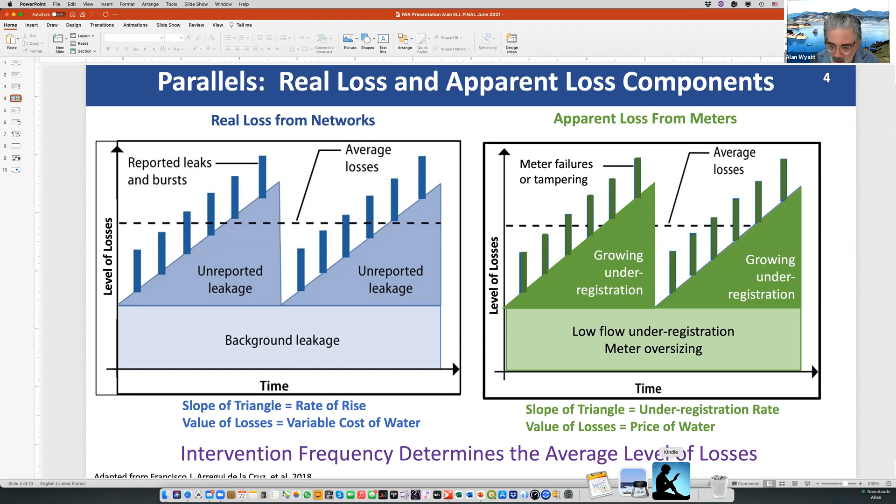Next, I want to just quickly highlight a couple of the ups and downs, positives and negatives. ELL is a really powerful tool in terms of balancing the value of lost water and the cost to save it. In a good world, a perfect world, it provides guidance on the best use of financial and water resources, in the best interest of citizens.

It's focused locally, which is important. In many cases it's not highly sensitive to inputs; in others it is. Another important point is that it can be represented as a range. You have what I call a valley here in the total cost, so you can operate in the valley as opposed to the very bottom of it.

Along with collaboration, ongoing evolution, application, and refinement is essential, and a key part of making it stronger. Now, on the other hand, there are, let's say, some downs, what I would call controversies or difficulties: is this the right methodology for us? Is this just some bothersome regulation? There are different points of view between financial regulators and water resource regulators, and we see this in many countries.

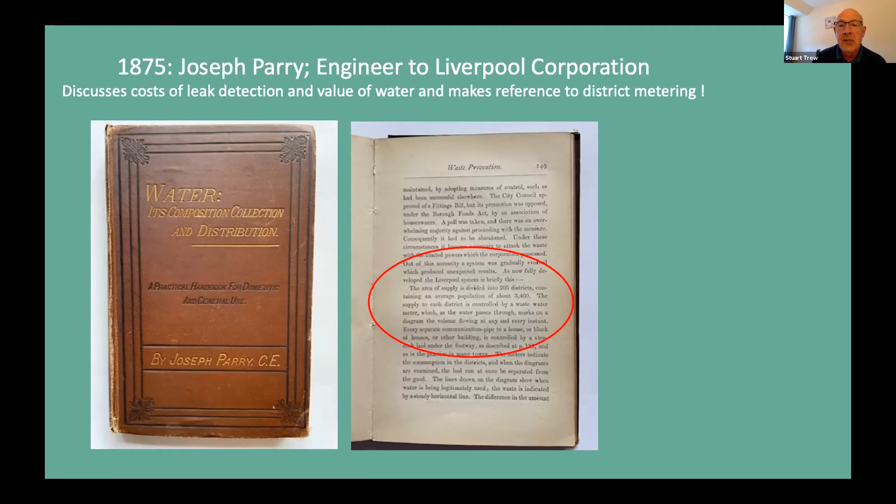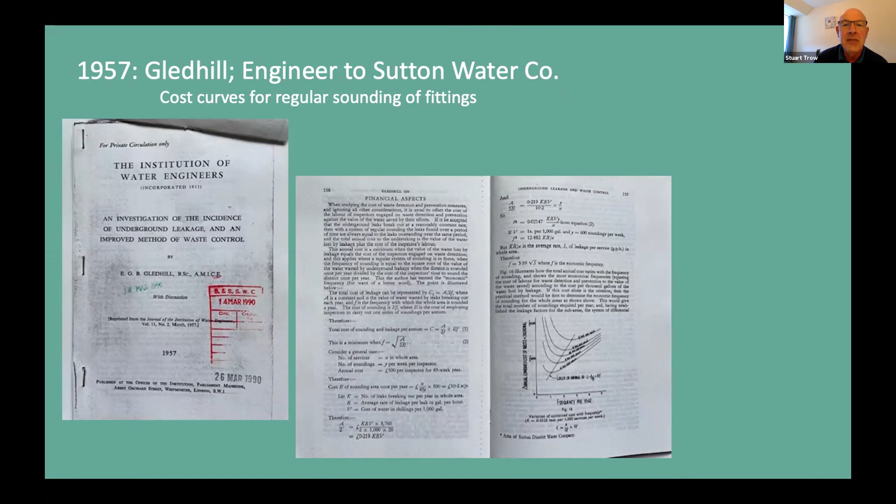And again, in 1974, symposium on waste of water for the Institution of Water Engineers, a lady called Judith Rees produced quite a detailed paper on economic level of leakage. Again, though, it was all short-run economic level of leakage.

The first real industry-wide research was carried out after a drought, quite a major drought in the UK in 1976, and led to the production of Report 26, which became the key reference document for leakage for a good 20 years or so. And in there you can see it defines the problem in clause 4.01.

It's clearly uneconomic to ensure that pipelines and reservoirs will never leak. It's also clear that there's an economic limit to the loss of water that should be tolerated through leakage. But Report 26 didn't really go into a lot of detail about how you should assess the economic level of leakage.

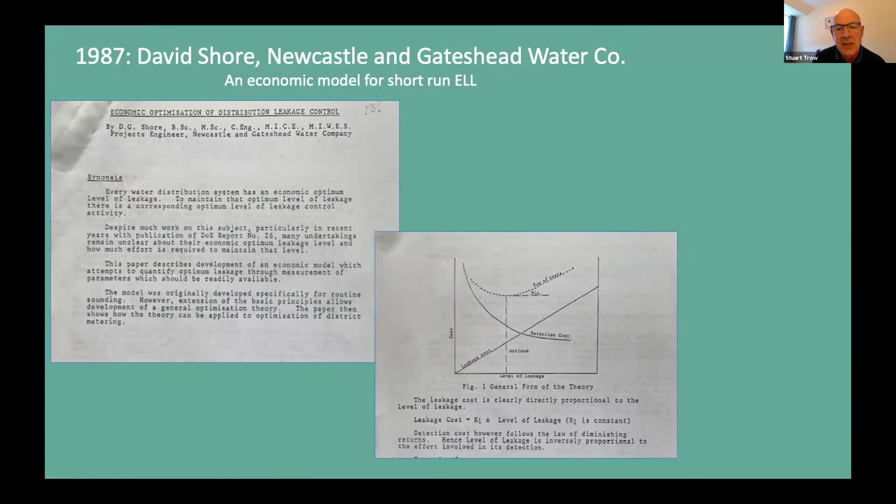It was only in the early 1980s that Judith Rees produced another paper, a second look at economic level of leakage. Then one of my colleagues, when I was at the water company, Newcastle and Gateshead Water Company, David Shore, produced an economic model. And this was the first time in my career that I saw this curve that Alan has shown, balancing the cost of detection and the cost of the lost water.

Then we had another drought in the UK in the late 1980s, and that led to a major research project, the UK National Leakage Initiative, and the definition in what was called Report C. I chaired the group that looked at economic level of leakage, and you can see down here it defines that the economic level is that level of leakage where the marginal cost of active leakage control equals the marginal cost of the leaking water.

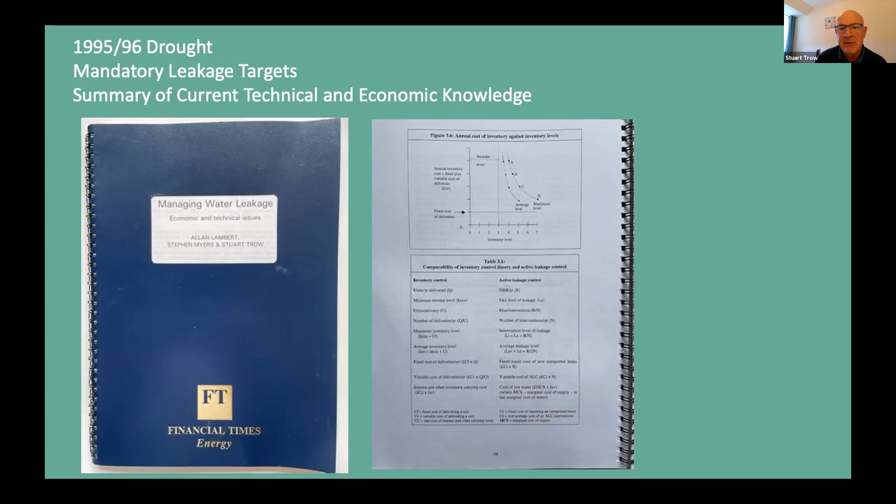Then another drought in 95, 96. We seem in the UK to have droughts that bring leakage to the attention of the public and the media, and then we do some research and publish some reports. I think it was 1997, Allan Lambert, myself and Stephen Myers got together and produced this document for Financial Times. We talked about economic intervention frequency and natural rate of rise and so on.

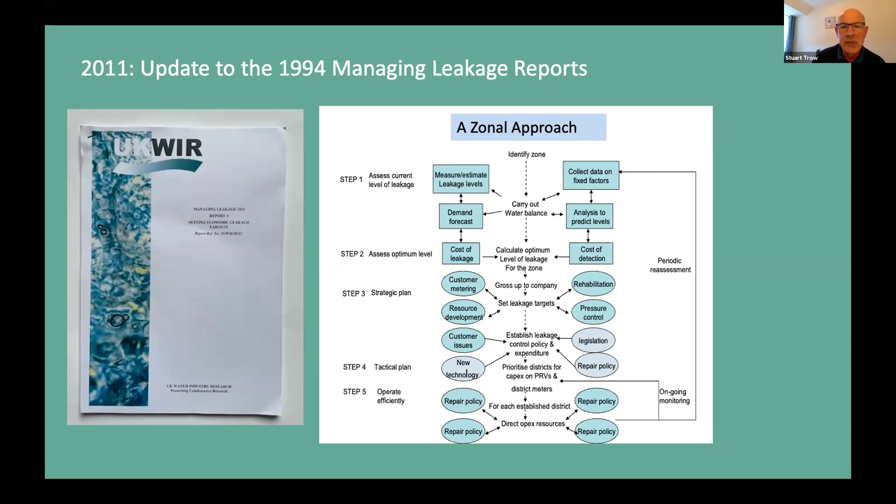And then updates to managing leakage in 2011, which David Pearson, who's on the call, was involved in, and Joe Parker, who's a member of the water loss group, was involved in this as well. We recommended a zonal approach where we calculate ELL at a zonal level, taking account of all of these factors, and then we gross it up to the company. So ELL is the balance somewhere between the current level of loss and the unavoidable level of loss.

Where do we land in that range?

Short-run ELL, to come onto some of the definitions, is about balancing the steady state. This is with current infrastructure, current pressure, looking really at active leakage control, find and fix only, but maybe some simple pressure management. So it's steady state.

Alan asked the question, which I think led into this: do we include repair costs or not? And the answer for short run ELL is no, because those repair costs are probably similar year on year. What you're doing here is balancing, influencing the runtime of those leaks by active leakage control and the flow rate from those leaks by pressure management. But generally you have the same number of leaks and you have to repair the same number of leaks.

So the factors affecting ELL: background level of leakage, the natural rate of rise of leakage, the cost of water, cost of ALC, and what you're doing with pressure management. I won't go into detail, but these are the things that you include in the cost of water when you're looking at short run ELL.

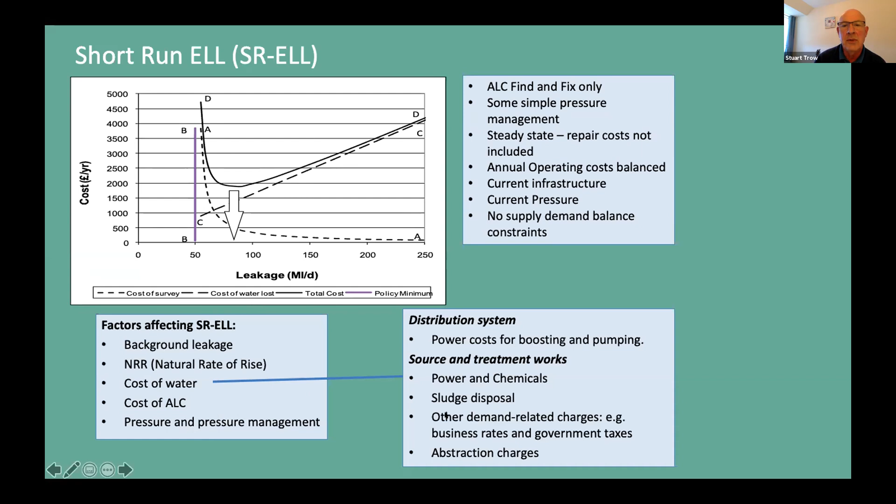Terminology, I've referred to some things already. So steady state is where the annual rate of repair is in equilibrium with the rate of breakout. Backlog is where you're not repairing leaks at the rate in which they're building up, and so you build up a backlog of leaks in the network.

And to reduce that backlog, you have a transition cost, and this is where, Alan, you should take repair costs into account. David might forgive me for showing this diagram, which I produced some time ago to try and explain this situation. I'll try and do it as briefly as I can.

Imagine a train on a track dropping off leaks, or barrels of water, along the side of this track, and it's followed by another train picking those leaks or those barrels of water up, running at the same speed.

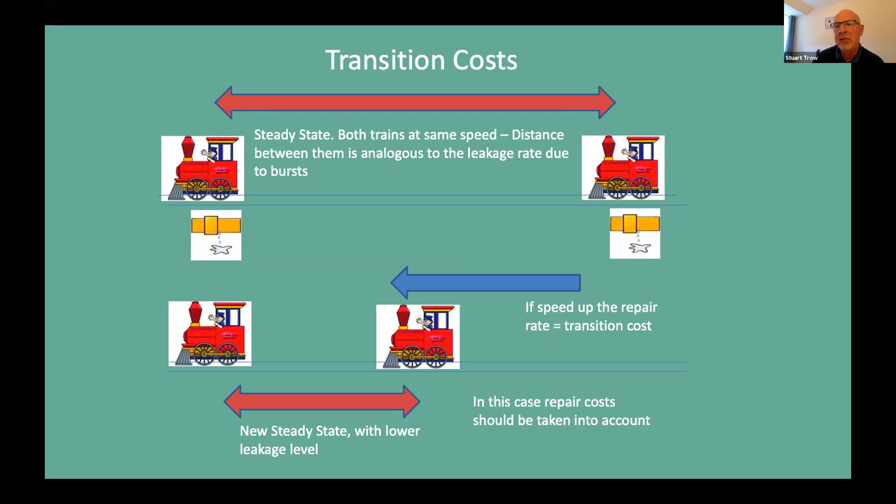The distance between those trains is equivalent to the level of leakage in your network. To reduce the level of leakage, the second train speeds up, picks up the barrels of leakage or repairs the leak, and you have a new steady state. It can't overtake the train in front, but the distance between those trains is equivalent to the level of leakage. That's where we bring transition costs and repair costs into account.

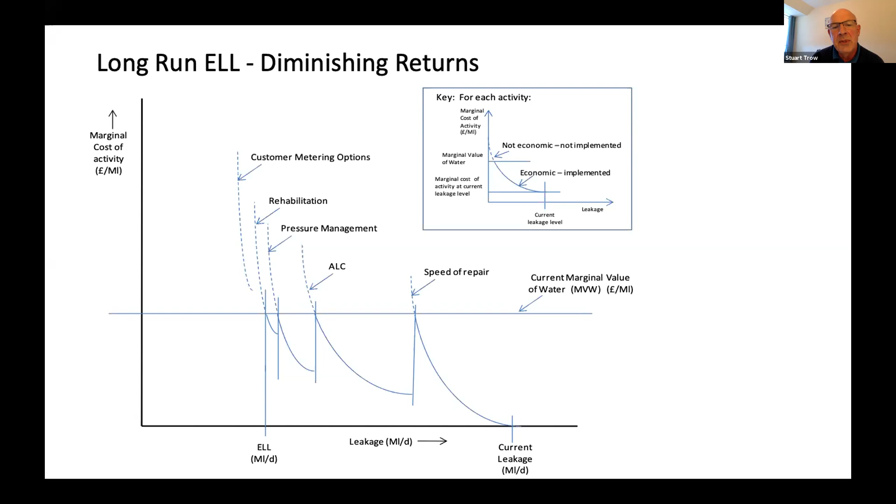So now moving on to long run ELL, everything we do with leakage follows a law of diminishing returns. Speeding up repairs is probably the most cost effective, then active leakage control, then pressure management. And then we get into some of the more expensive options of mains replacement and so on.

And when we're looking at long run, we need to take account of the demand forecast. We need to take account of the headroom, the difference between the available supply and the demand. As demand in the network increases, we start to reduce headroom. So the value of water will depend on how much headroom you have and how that changes over time.

Stuart, you need about 4 minutes or so to go. I'm sorry to press you, but run through as quick as you can, Alan.

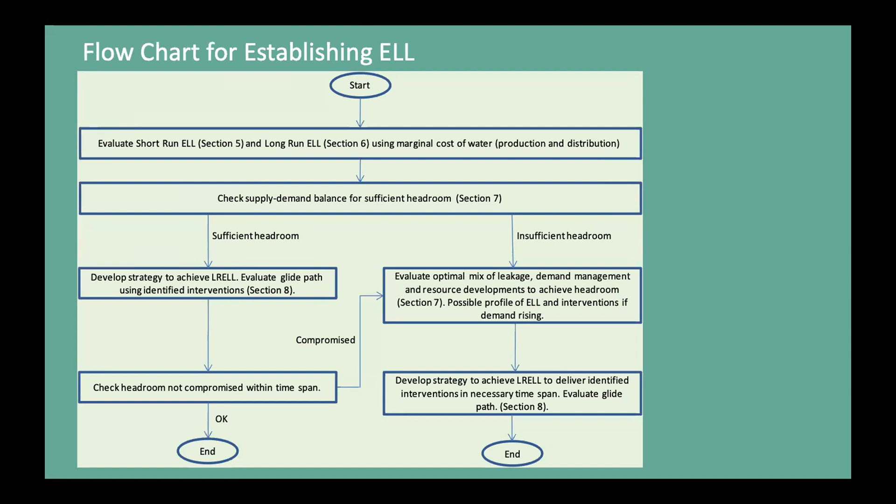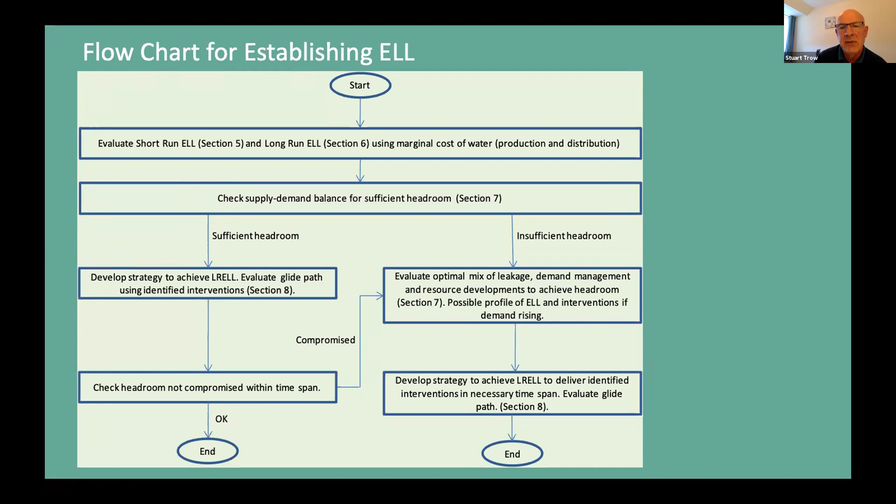So in one of the research reports that was done, we had a flowchart for establishing ELL. I won't go into detail, but you can see it follows two tracks: one where you have sufficient headroom down the left-hand side, and one where you have insufficient headroom down the right-hand side. And in the UK, we had a tripartite study involving the regulators in 2002.

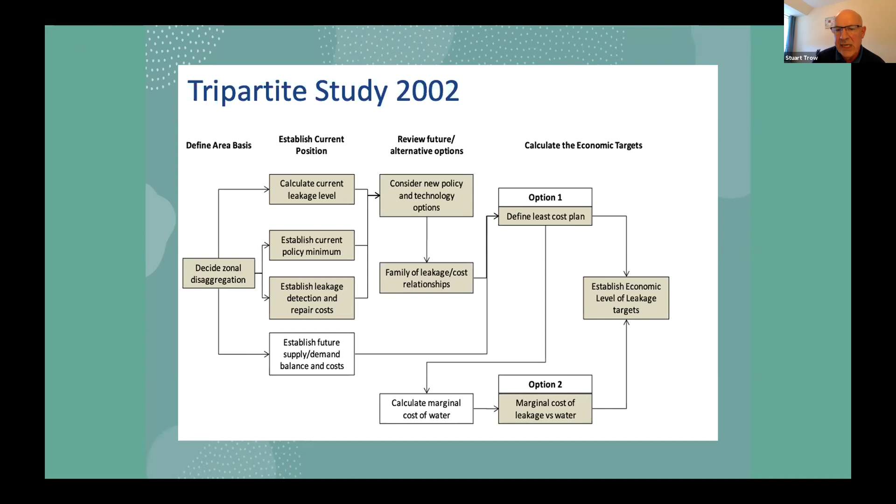They came up with a methodology of what we call the least cost plan for looking at the long run economic level of leakage. This is where we look at the available headroom, the target headroom, and as that headroom starts to reduce, we have interventions: ALC phase 1, pressure management phase 1, infrastructure replacement phase 1, and so on, to manage that demand to maintain the available headroom. The least cost plan is coming up with the least cost series of interventions to maintain that headroom.

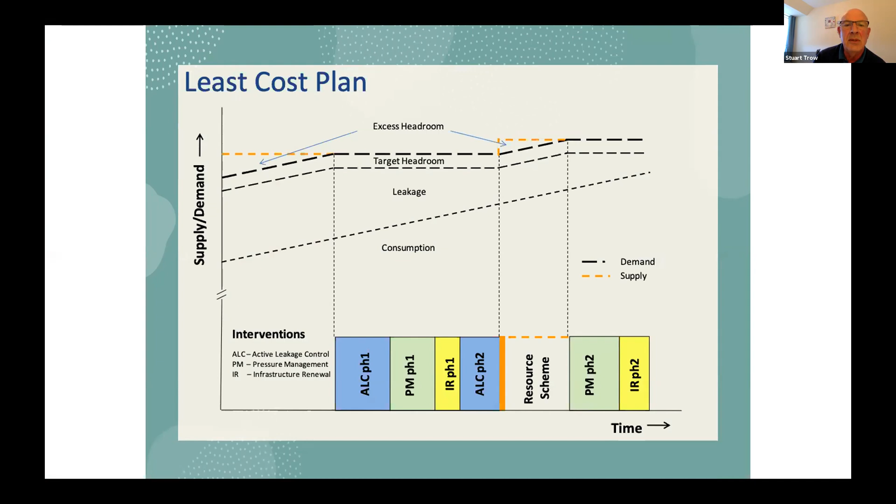Then that tripartite review was reviewed again, and there was a feeling that we needed to do more and put more value on the water. So instead of just looking internally at short run and long run costs within a company, this is where we started including what we call externalities.

Environmental and social costs are the difference between long run ELL and sustainable ELL. SELL includes social and environmental costs and other externalities.

SELL was reviewed in 2012. I was part of the SMC team that reviewed it, and we drew some conclusions, one of which was that it was becoming a bit of a self-fulfilling prophecy, in that SELL was heavily influenced by the background level of leakage and various other things. We made some recommendations, which again I don't have time to go into.

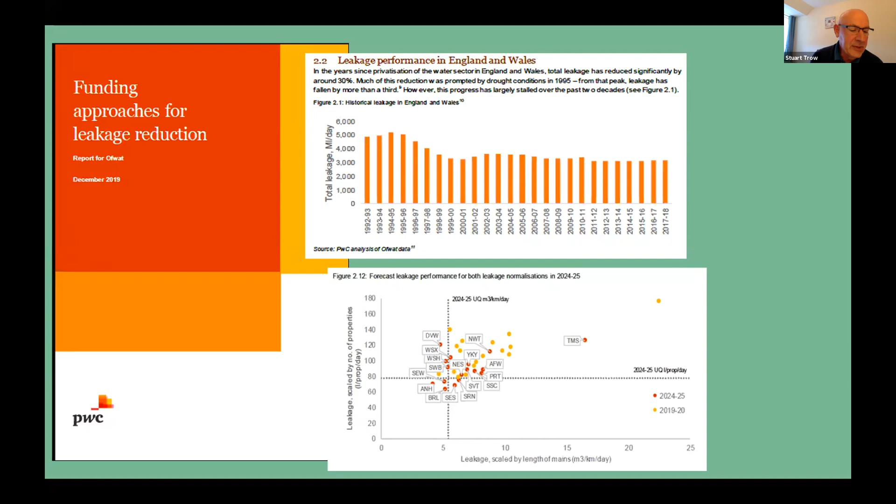But this is the final slide, to keep on time. Each year, OFWAT produce what's called a service and delivery report, and they look at a number of KPIs - you'll be able to find this report online. One of those KPIs is leakage, and essentially the companies are now assessed as to whether they've met their leakage target or failed their leakage target.

All of the companies accepted this challenge of reducing by 15%. I think some of them may be starting to regret that, because I gather that some companies have failed their target for 2021. Most have passed, but some have failed.

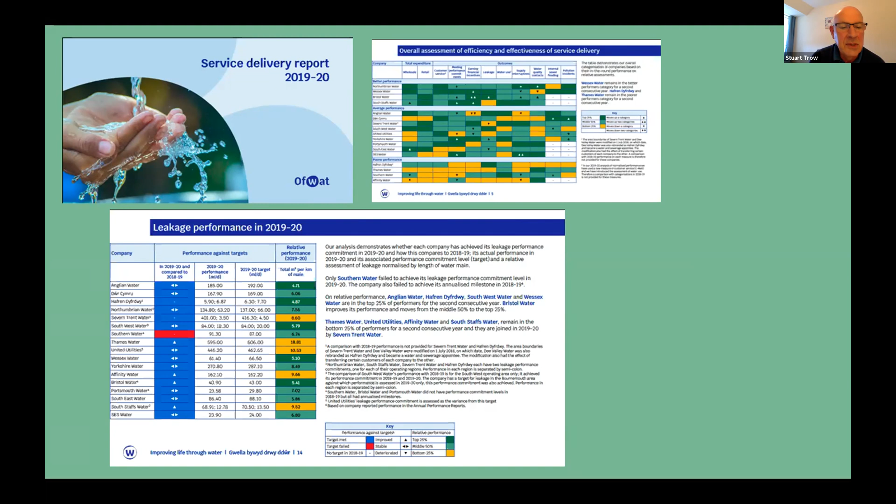I want to point out one thing - I highly recommend people look at those service delivery reports. I think they're brief but detailed, and I find it to be very useful. Second, you can see the process involved in the UK. This is not done overnight, and there are a lot of lessons learned along those years.

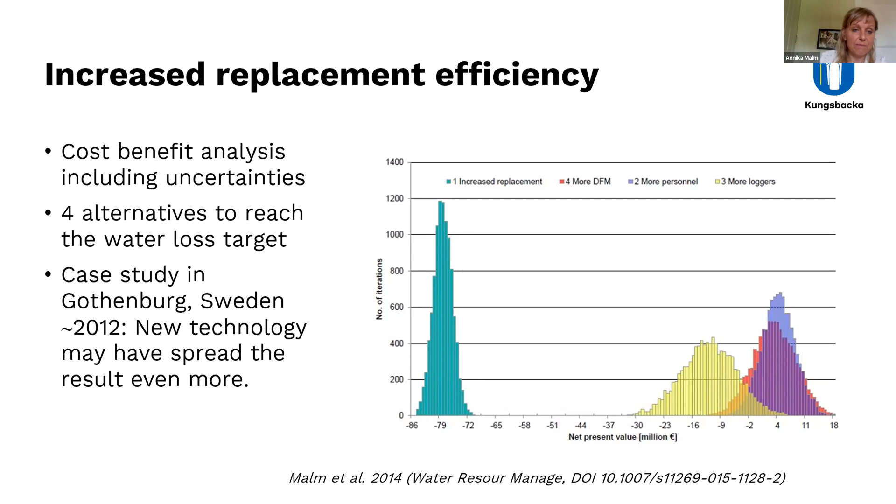So the conclusion of the study or the project we did is that, of course, ELL and CELL, it's for you when you are managing the utility itself. So you have to find your own level, and then you need to know how you should work with it in your utility. But you get a very good help with this spreadsheet that we developed. And ILI, we think in Sweden, it's good for benchmarking between different cities, because it's so different. Some municipalities have a very long length of pipes and others are very dense. So this ILI is good for us to benchmark between cities and utilities. And when you work with this, you get control of your water losses and you get control of your system, and that is also a value.

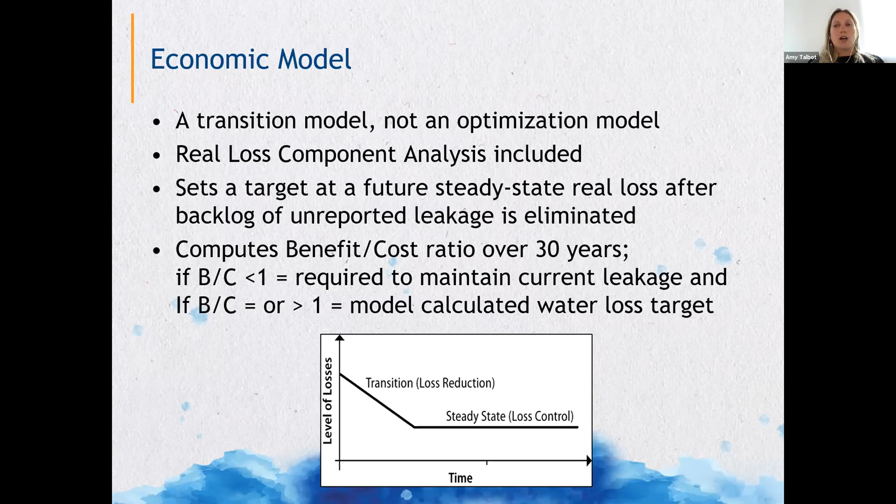So this was sourced from the M.Cubed David Mitchell memo that we had done for this purpose.

Okay. Thanks, Alan. It's a pleasure to be here to share my experience with the economic model, and I will show some topics here. I'll start with before 2010. We had some questions like: what is acceptable water loss for allocation? Sanepar operates 345 municipalities, but what is a good water loss for each location? How much resource is it worth investing to reduce losses? How low should we go?

Then I watched Alan's presentation at the Water Loss Congress 2010 when he presented this document, and I thought, problem solved. So I started... You're exaggerating, but anyway, go ahead.

I started to study the topic, and I realized I had another problem. We need a water balance. We need more data, field data. But now we have a translated and updated manual, which Rita is going to present.

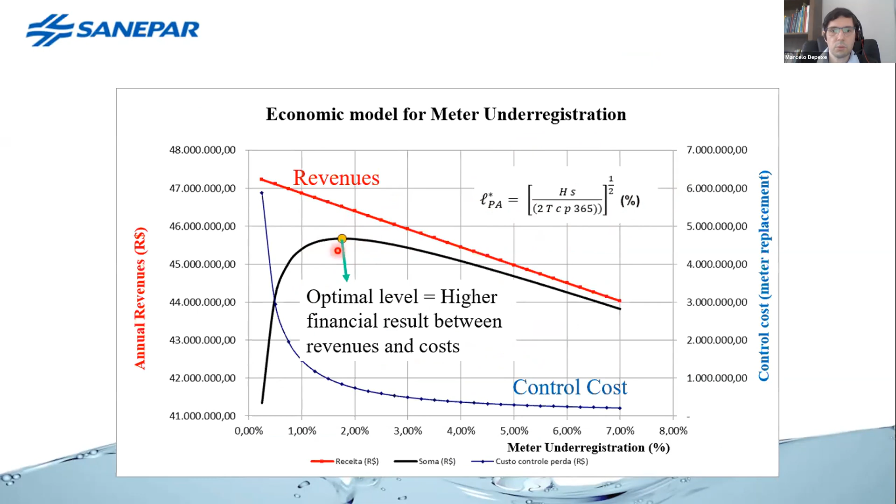We made some improvements in this model, like the inclusion of the initial meter under-registration of new meters, calculation of what I call a net tariff, discounting the government taxes and fees, and model application for each cubic meter of consumption, instead of just one calculation for the whole considering the average. This is because for different consumption levels, we have different prices in the tariff, and sometimes the cost of the meter is different.

For example, if the average consumption is 12 cubic meters, we will have one result in terms of optimal under-registration and time for replacement. But that's different if the consumption is 18, or different if it's 23. So in this way we have more accuracy, and that originated a new policy for meter replacement.

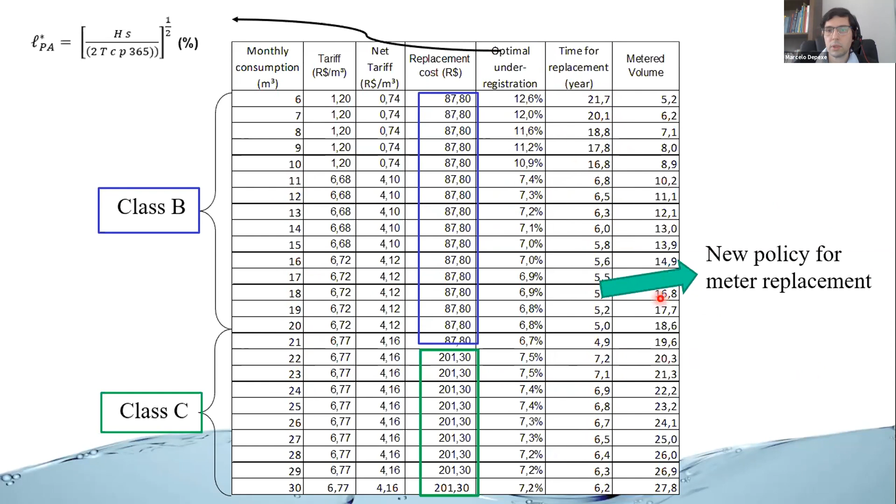In the real loss model, we have a variable water production cost, a capital cost for expansion, and the control cost. We look for the minimum point on the total cost curve. But here it's more difficult because we need data from the specific location, which depends on the specific characteristics.

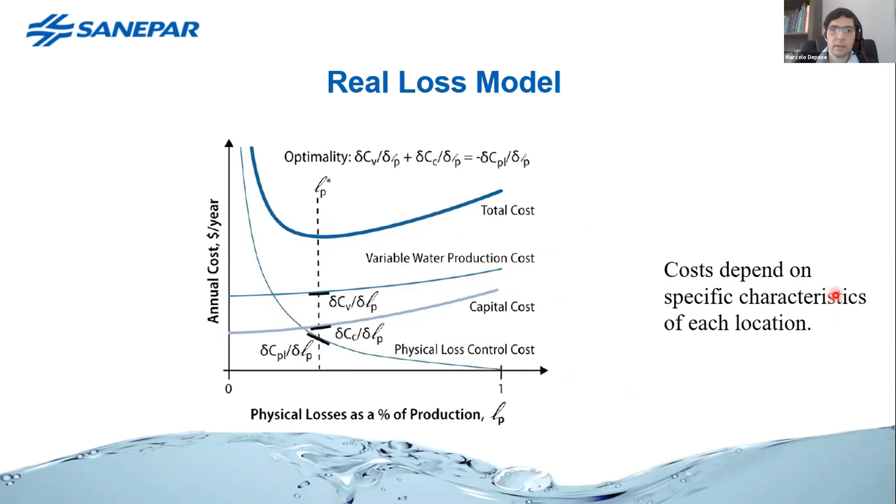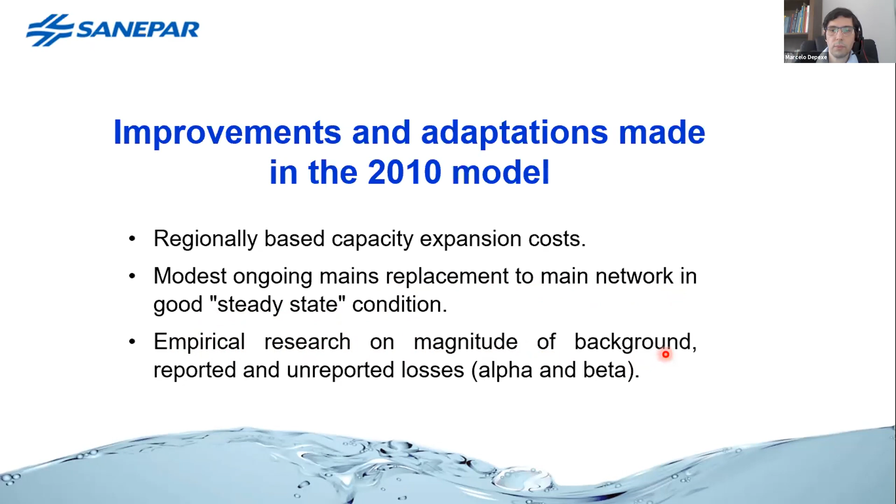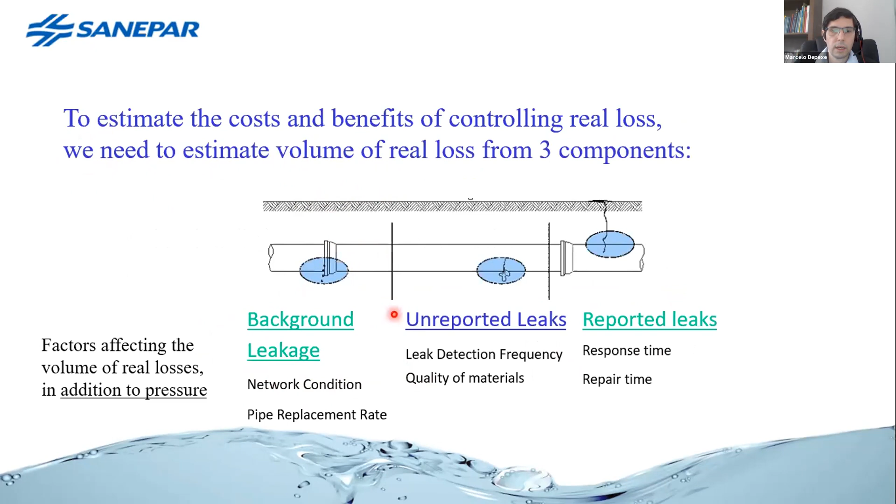Some improvements made in this model are a regionally based capacity expansion cost, a modest ongoing main replacement to keep the network in good steady state condition, and empirical research on the magnitude of background, reported and unreported losses. Because one of the important things in this model is the need to estimate the volume of these three components: background, unreported leaks, and reported leaks.

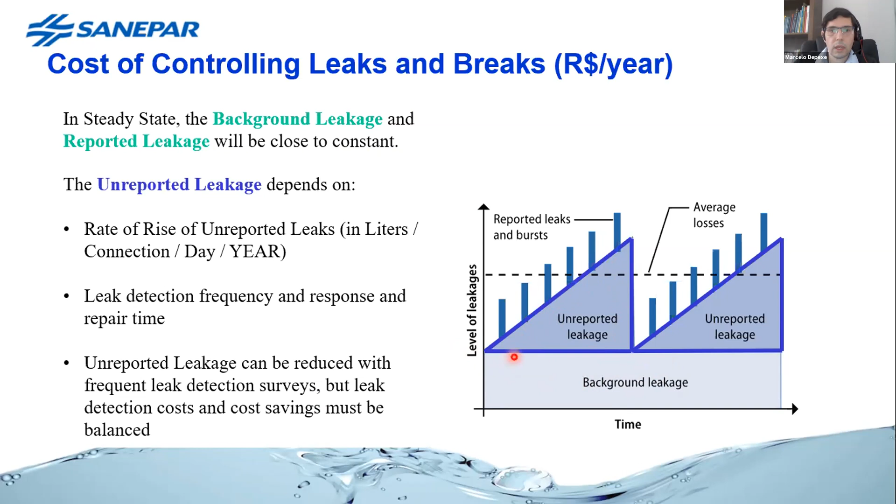The model works on the reduction of unreported leakage, and that depends on the rate of rise and leakage detection frequency. We call alpha the background leakage plus reported leakage, and beta the unreported leakage, which is the increase per year of unreported leakage.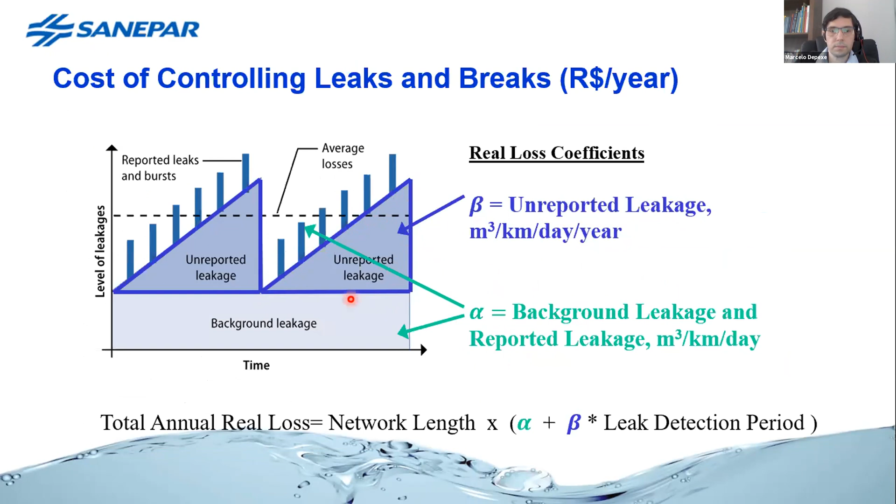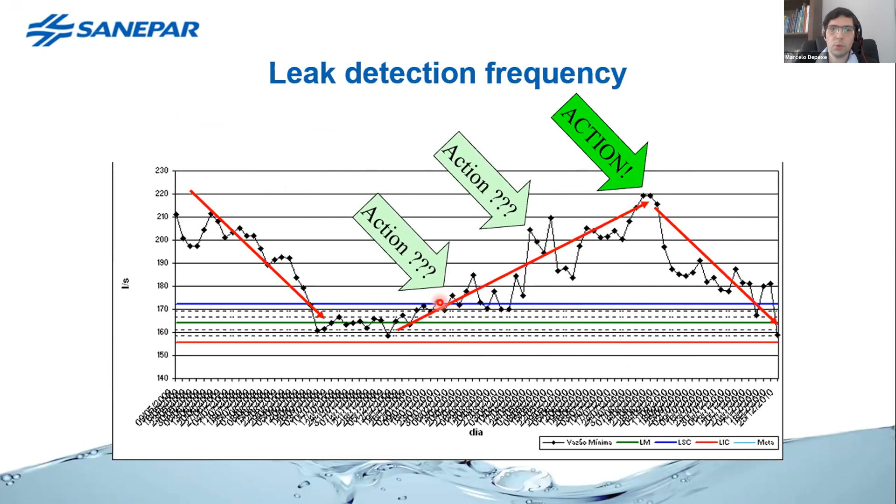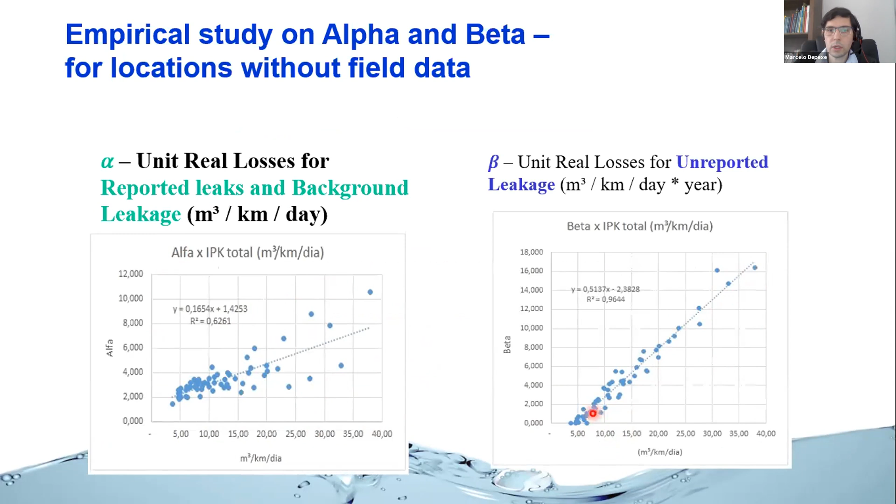For this, we use concepts like burst and background estimate, fixed and variable area discharge, and unavoidable real loss. But this requires field data, lots of field data. For locations without field data, or with less reliable data, I made some empirical studies trying to correlate this with total loss, and we got good results, especially for beta. This can help the work Rita will present next.

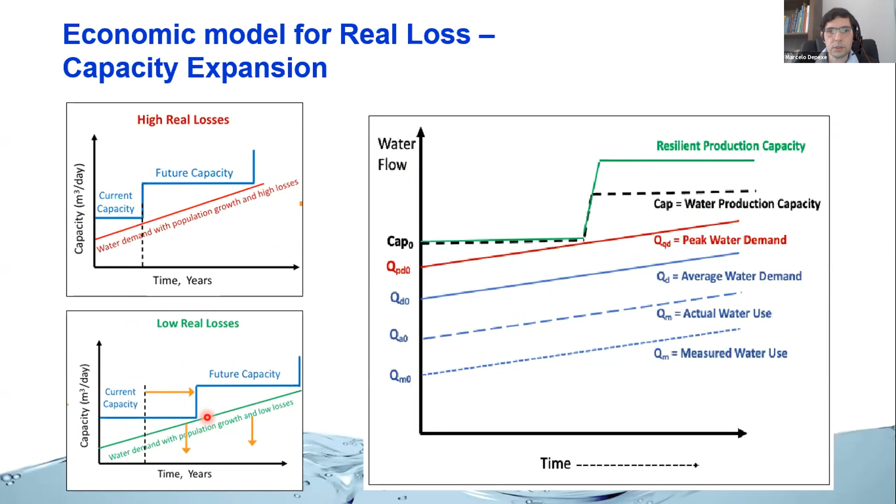And that is an example of the result of the real loss model. We look for this yellow point here. In this example, the economic level is 70 liters per connection per day. But we realize that here we have a patamar, an interval. We can set up an interval in this example between 63 and 80 liters per connection per day. The total cost is very similar.

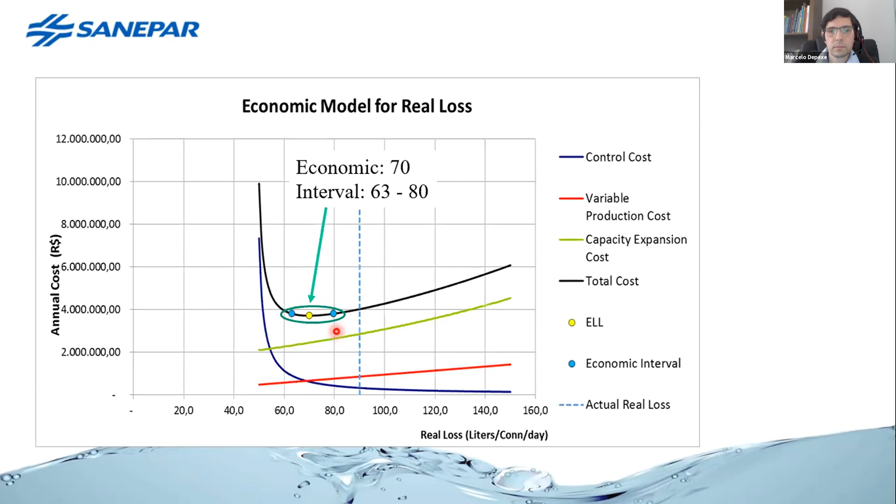So the target doesn't need to be exactly a point, but it should be an interval. And the width of this interval is influenced by the magnitude and the shape of this green curve, the capacity expansion curve. So for example, if the costs are small, both capital costs, the economic level is higher and the interval is wide. But if costs are higher, if you increase the costs, the economic level is lower, like 70 goes to 63, and the interval is smaller. So you need to pay more attention in this situation. The total cost here will increase faster.

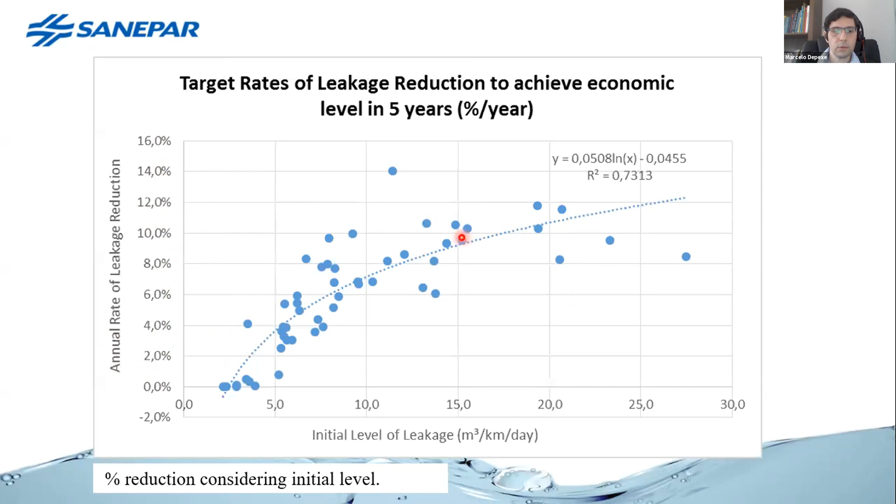And now we start to study the evolution, how much time we need to achieve this economic level. So here is an exercise to try to understand the target rates of leakage reduction to achieve that economic level in 5 years. Some systems probably will take more than 5 years to achieve that economic level. So the identification of economic level of losses makes it possible to optimize the available resources. The economic model is very useful for setting targets and investments, and the time needed to reach the economic level varies from place to place.

Thank you. Here's my email, and we can ask some questions later.

Thank you, Alan. Thank you, Marcelo. Alan, you are muted, we can't listen to you. Oh, thank you, Rita. I was just thanking Marcelo for a good presentation. There is a question we will get to after your presentation, Rita. So please go ahead, Rita. Rita, now you are on mute. Please unmute yourself. But I wasn't talking, I was sharing my screen. Okay, let's start, thank you.

So first of all, are you seeing my screen? I suppose so. Okay, first of all, thanks IWA for inviting me. Thanks Alan, thanks to the others from Sweden and from California who are here with us and from England. And I'm going to talk about upscaling of the ELL across Brazilian utilities and regulators.

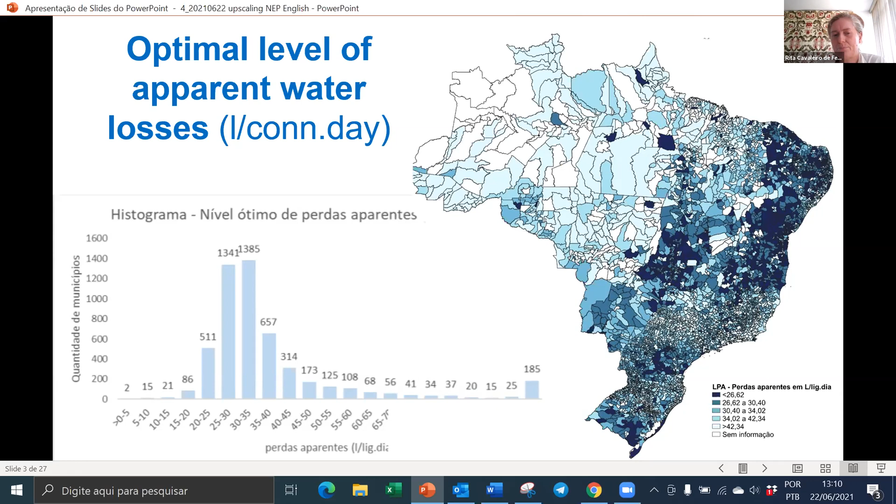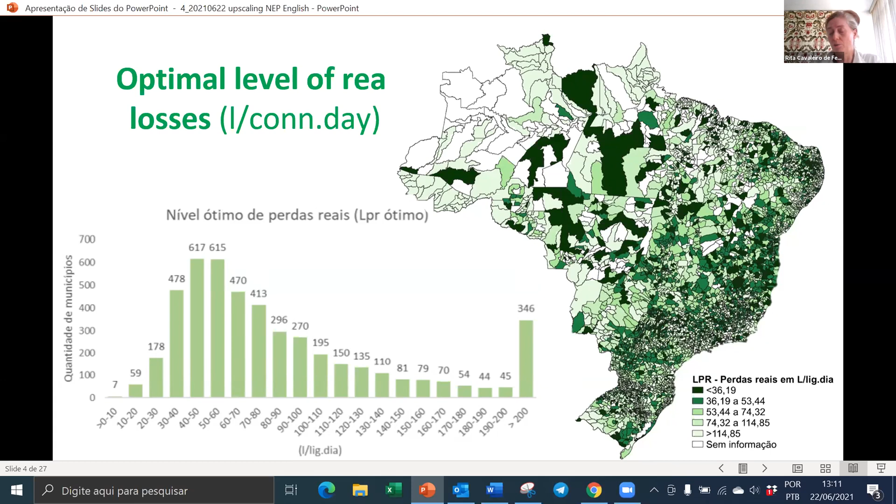These are, I'm not going to, I know numbers are always very interesting, but with these 2 slides I don't want to show the numbers. I just want to say that the numbers exist for every municipality in Brazil. We have this map of apparent water losses, so it includes under-measurement but also frauds. And then we have this other map for real losses and what would be the economic level of real losses. For example, you see here in the map in the north, there is Amazonas and there's plenty of water, but still one of the main issues was what was the existing capacity there. So even if they have lots of water, the existing capacity was not too much. So that's why the economic loss here is very low, or it was one of the factors contributing.

We teach the model mainly through conferences, but also through two learning networks. These two learning networks had two target groups. One was the utilities, and we had 65 utilities participating, and the other was the regulators group. We had 24 regulators participating, and both of them ran for more or less a year. The topic of these learning networks was water and energy loss control, and so ELL, the Allen model, was one of the big highlights on the menu of this course. We hoped that with these learning networks, we would gather a critical mass of professionals that might generate momentum.

In these learning networks, we have 89 participating entities, but only 29 of them had the time and were willing to put hands on the model. We have the spreadsheets that you all know, and through many questions, we improved also the models. Some of the service providers even developed other outputs and made their own variations, so it got a life of its own for some.

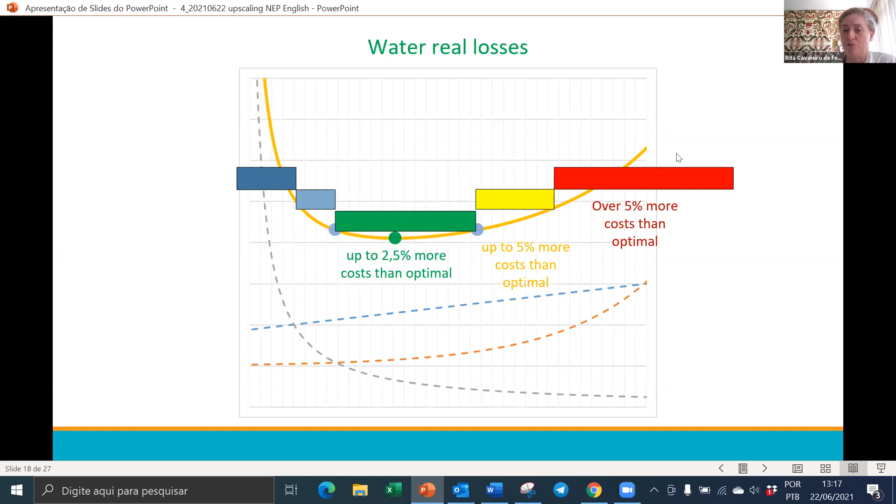On the other side of the curve, we have the overperformers. If you are too steep on this part, we don't know if there are still advantages to being so overperformer. On this side we still have some environmental advantages, but further on this side of the curve, we don't have any benefits from being in this area.

So we checked out how the municipalities look, and it was a big surprise for us that we have a lot of good performers, but also overperformers. We always had this intuition - well, not intuition, but we thought, 'oh, Brazil is so bad, water losses are so bad, we need to improve.' But not everybody - it was more than we expected. More municipalities are okay than we thought they were.

Another thing about reality check, from all the conversations I've been having, is that governmental actors prefer simplicity, having only one water loss indicator, be it percentage or liters per connection per day. But I advocate that for the regulatory and environmental contract, we need at least 2 targets - one for real and one for apparent losses - because they mean different things, have different consequences, and also different time frames to address and mitigate.

My third point, the last point I want to say, is about the Brazilian outlook. I hope that the economic level of losses will be further discussed and that more experts will be proficient in the model. There is a law issued last year that says until March 22, all service provision contracts must have water loss reduction targets.

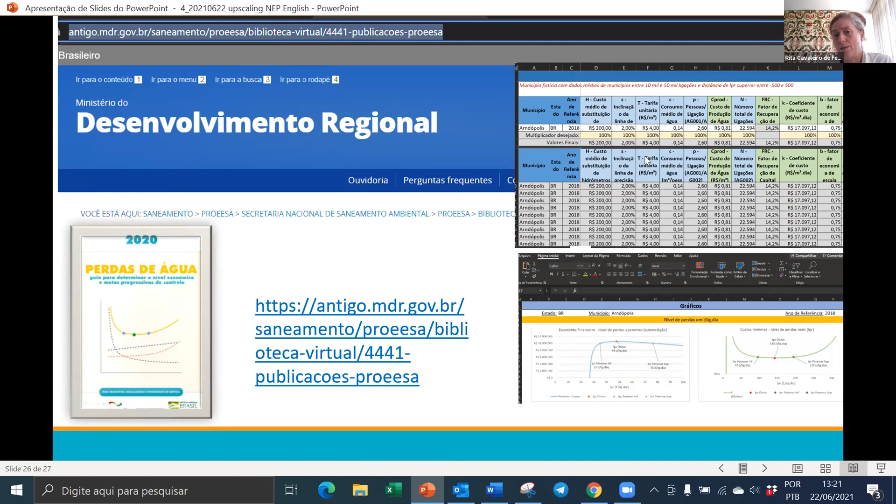To finish, on this link you can download our translation and also our Excel sheets where you can make your own variations. And that's it. Thank you for your attention.

Thank you, Rita. You've covered a lot of ground, and I think that these institutional issues, particularly the training and outreach that you began early in the process, and getting feedback and refinement from different points of view, has really helped make the model as close to the Brazilian situation as possible.

Not that it's uniform, but there are two questions here. One is the inclusion of capacity expansion costs. Why is that included? I think the thinking is that that's not short run and the model isn't long run, if that's a way you're thinking of the question, Paul. Is that true?

I don't know if Paul can hear it. Yes, he says. Well, this is the way that I built the 2010 model, and it was largely based on the California Urban Water, sorry, I can't remember the name that Amy mentioned, and the avoided cost models that they had.